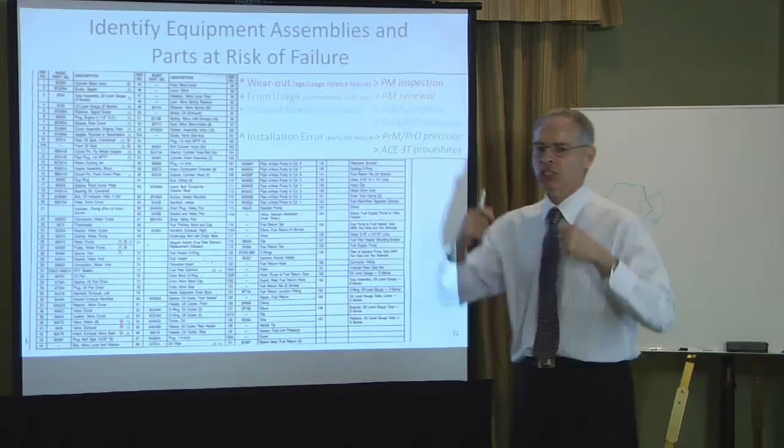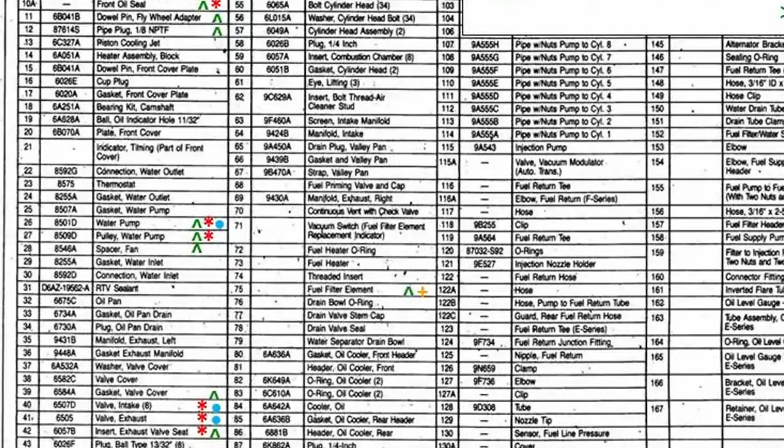So I can now take my parts list and put on my stress manager's hat and say, okay, which of these parts are going to wear out from use? In which case, I'm going to inspect them on a regular basis to see how quickly they're wearing, track that, trend it, and monitor that. What parts will actually degrade from use? What parts are intentionally going to fail by their service?

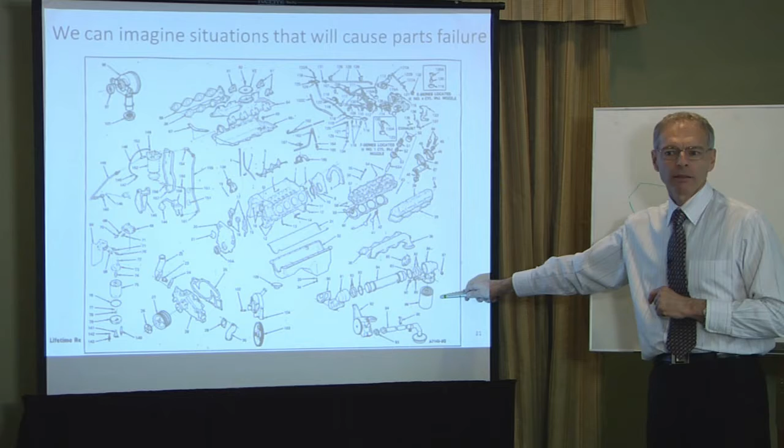Here we go, oil filter. That filter will degrade intentionally by use. And there's a fuel filter in there as well. So any parts that by their use will be contaminated and will degrade on purpose - it's designed that way - well, I want to renew those at a particular frequency.

Which parts are going to fail from stress? These are going to be the parts that see high temperature, high loads, high working operating conditions. If I can identify those off the drawing board, then I know I'm going to have to do a couple of things there: one is to monitor their condition, keep an eye on how much stress they're accumulating, and more importantly is to not let them get stressed, because stress is the killer.

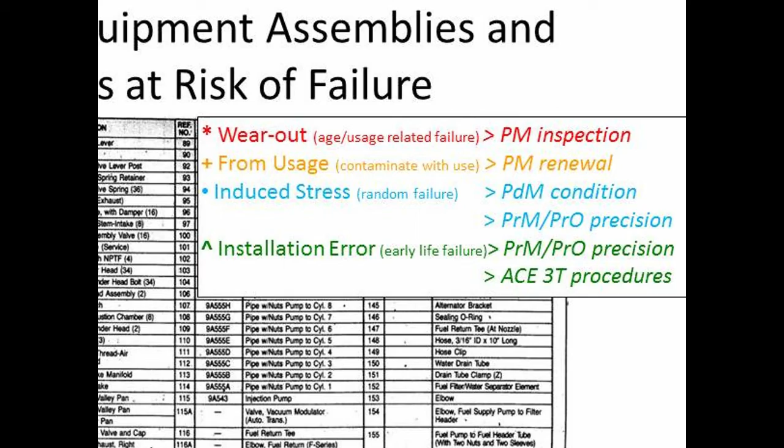Some operating practices - I'm going to have precision operation. I'm going to train my guys how to operate that machine perfectly, because I know from the design engineering what its operating zone is. So I'm going to teach my guys, I'm going to design that process of operation, write it right down like a movie script, right down to the detail of exactly what to do, when, and how to do it, and train my guys to this, because I know if I can control stress, I'm going to control reliability. And same with precision maintenance.

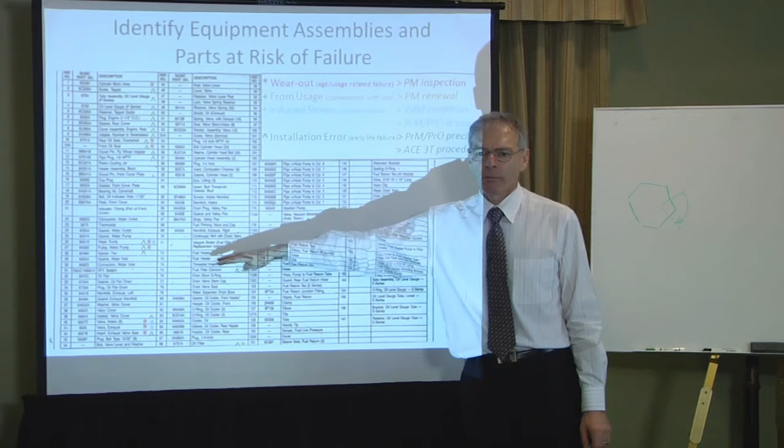I'm going to make sure the machine goes back in prime condition, everything's spot on, because I know where the trouble's going to be. From my experience as an engineer, as a designer, as an operator of these machines, I understand where the troubles will be.

The big one, which is the one we're going to have to front as an ongoing issue, is error - installation error, human error. How many of these parts can be put back incorrectly? Because if they can be put back incorrectly, and that leads to a breakdown, I want to know that now.

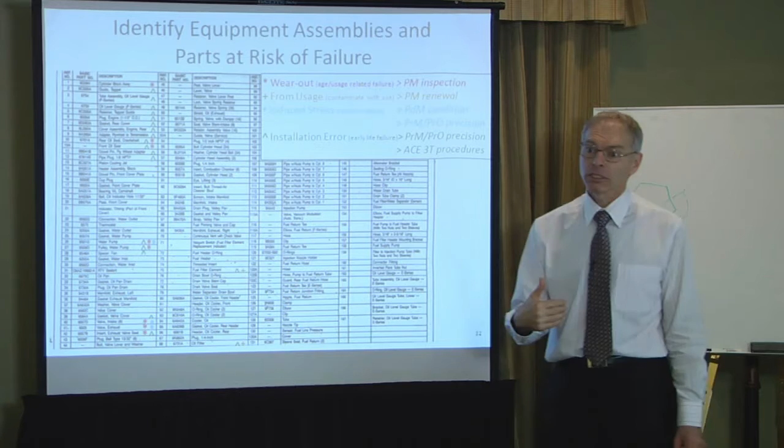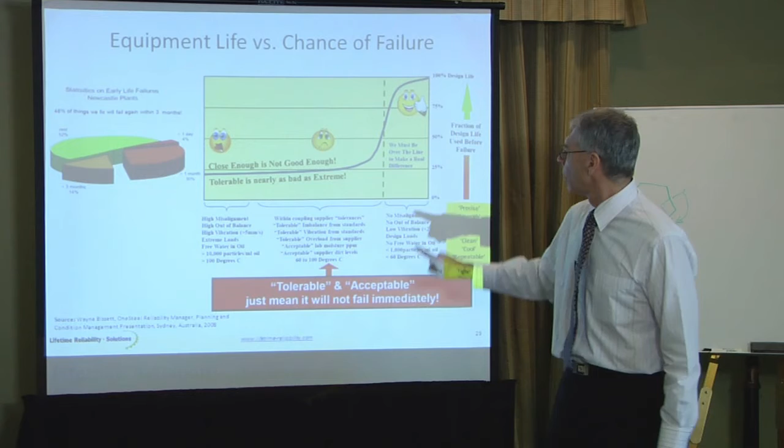So when I build my manuals and write the procedures, I'm going to write exactly what to do properly, because I have no choice. I've got to be in that zone - I've got to be in that zone all the time, from the day it's brand new to the day it retires in 25 years' time. And I've got to build the process to be in that zone all its life.

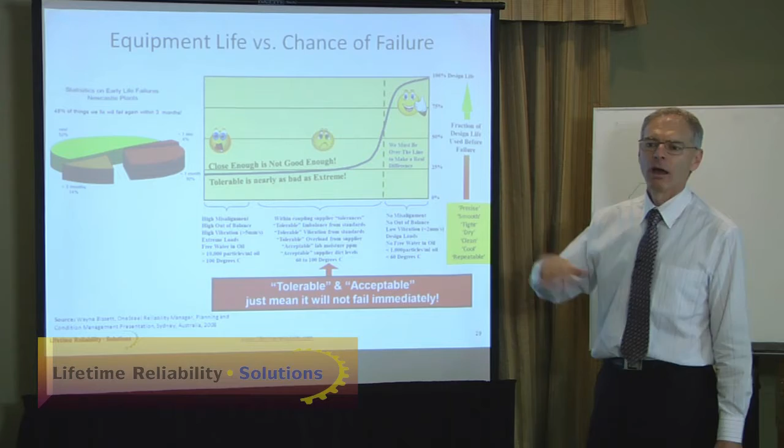If I can do that, then I am controlling the scenario of this machine's reliability. And I can do that off the drawing board, off the parts list, because I can find those risk scenarios and put into place some protection against those risks. So when it comes to wellness, what will make these parts well, and how do I keep them well all the time?